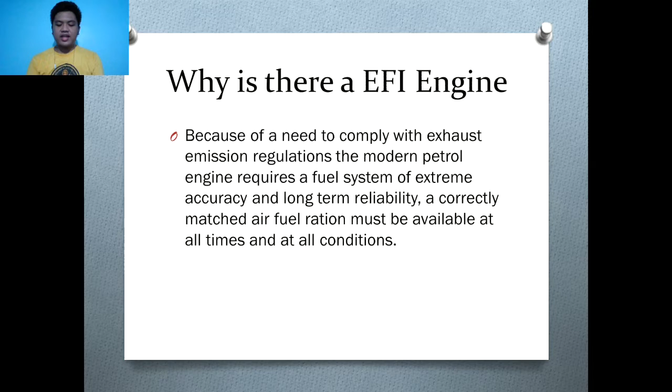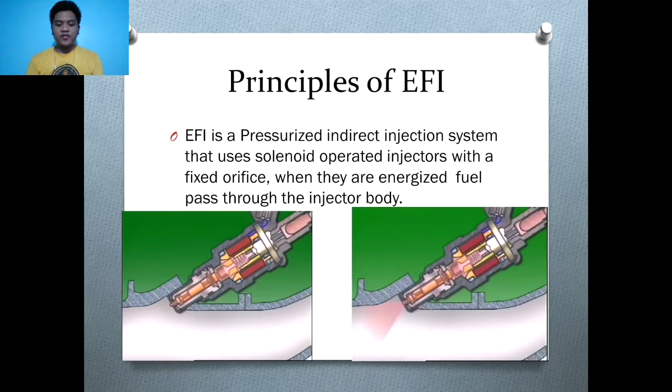Principles of EFI. EFI is a pressurized indirect injection system that uses solenoid-operated injectors with a fixed orifice. When they are energized, fuel passes through the injector body. So it has a similar approach to a fuel system of a diesel engine, but instead of an injector pump, the fuel injector is controlled by a solenoid to inject the fuel inside the manifold.

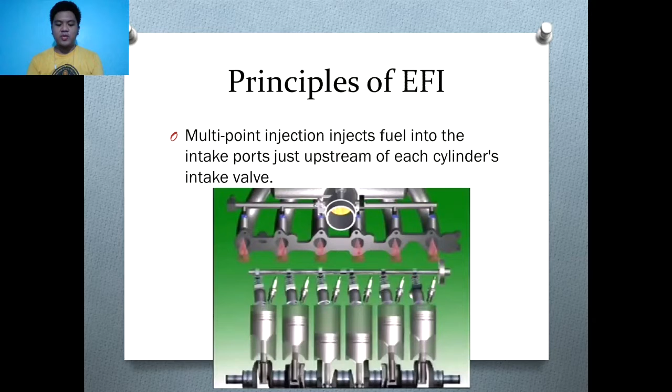Multi-point injection injects fuel into the intake ports just upstream of each cylinder's intake valve. This is one of many types of EFI layout for a petrol engine, but I believe this is the most common on sedan cars today. An electronic control unit, also known as ECU, opens the injector by pulsing their electrical current, then sprays fuel in each port directly in front of each intake valve.

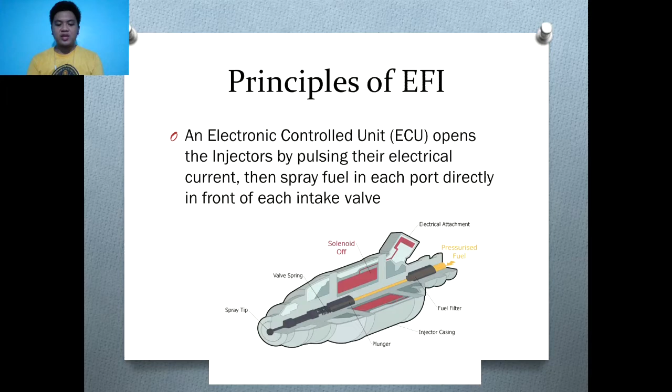Fuel leaving the nozzle is atomized and it mixes with the air also entering the system to form a combustible mixture. So unlike the carburetor, in which through the vacuum of the manifold, the fuel is sucked inside the intake manifold to mix with the air, for the mixture, EFI atomizes the fuel as it mixes with the air going inside the air intake valve.

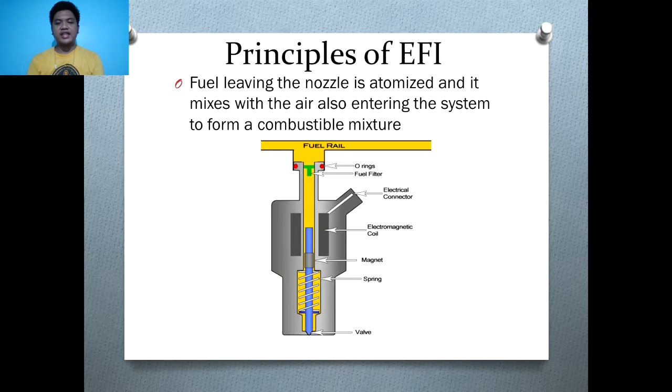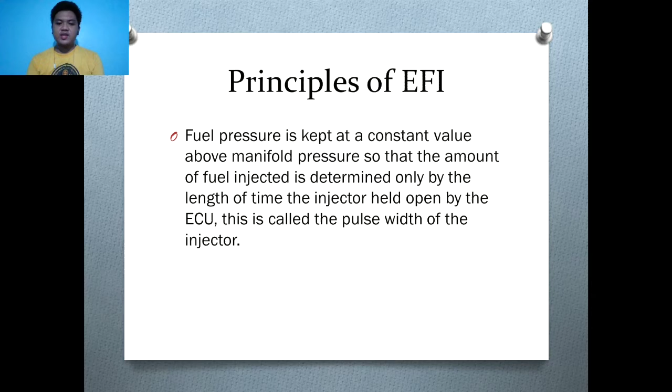Fuel pressure is kept at a constant value above manifold pressure, so that the amount of fuel injected is determined only by the length of time the injector is held open by the ECU. This is called the pulse width of the injector. Pulse width of the injector is a pretty complicated topic, but to simplify things, it is the duration of how long the fuel injector must be open.

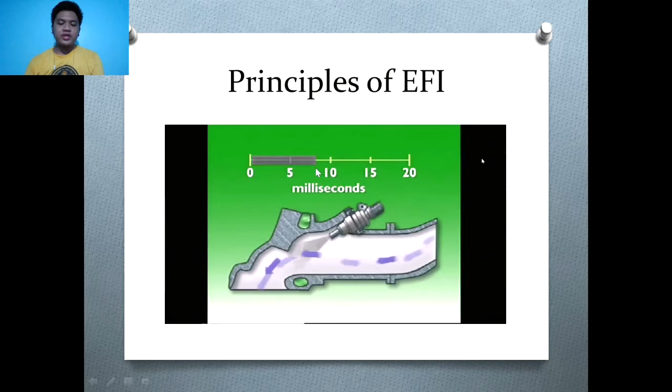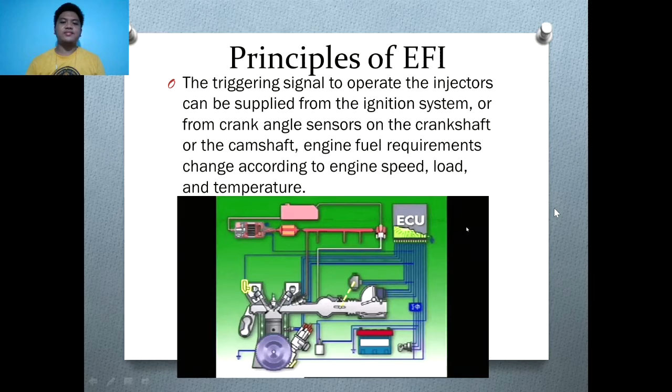The trigger signal to operate the injectors can be supplied from the ignition system or from crank angle sensors on the crankshaft or the camshaft. Engine fuel requirements change according to engine speed, load, and temperature. So you can see again in this GIF, this is the ignition system, crank angle, and the camshaft angle is right around here, and it all flows back to the ECU.

So the ECU needs information on these changes. Sensors measure this variable, then relay the information to the ECU in the form of electrical signals. The ECU then calculates the duration of pulses necessary to provide the fuel required.

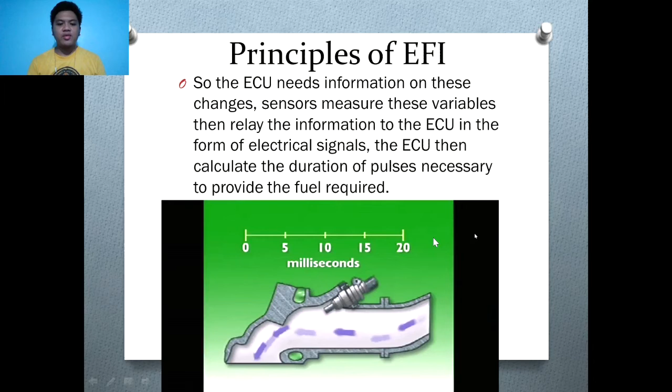Operation of an EFI engine. The gas pedal in your car is connected to the throttle valve. This is the valve that regulates how much air enters the engine. When you step on the gas pedal, the throttle valve opens up more, letting in more air. The ECU sees the throttle valve open and increases the fuel rate in anticipation of more air entering the engine.

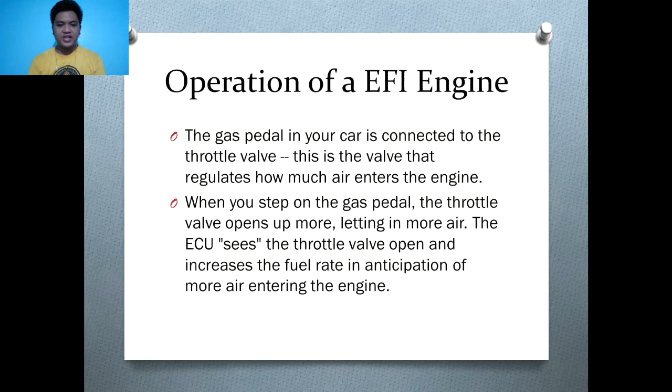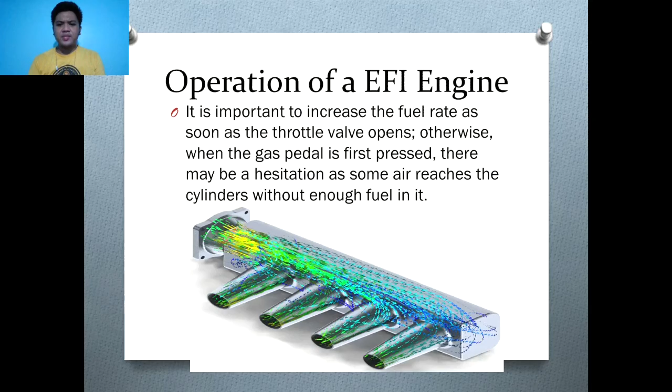So this is what the throttle body looks like, and it also looks like the throttle body plate of a carburetor. It is more important to increase the fuel rate as soon as the throttle valve opens, otherwise, when the gas pedal is first pressed, there may be a hesitation as some air reaches the cylinder without enough fuel in it. Sensors monitor the mass of air entering the engine as well as the amount of oxygen in the exhaust. The ECU uses this information to fine-tune the fuel delivery so that the air-to-fuel ratio is just right.

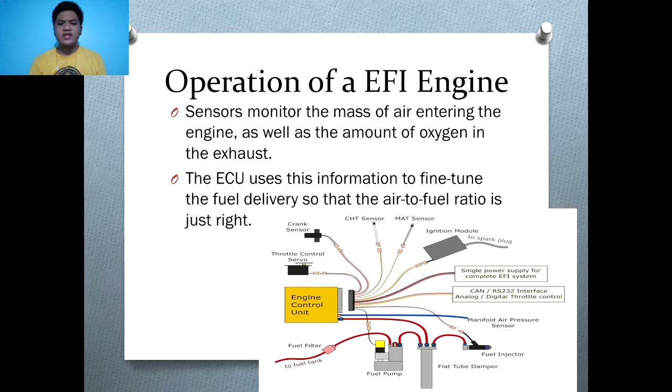ECU sensors: the mass airflow sensor tells the ECU the mass of air entering the engine. Oxygen sensors monitor the amount of oxygen in the exhaust so the ECU can determine how rich or lean the fuel mixture is and make adjustments accordingly.

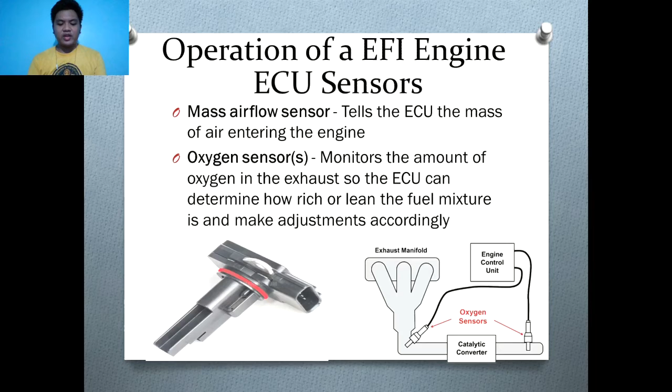The mass airflow sensor is responsible for telling the ECU how much air is flowing in the intake manifold, so the fuel injectors can compensate the fuel mixture. The oxygen sensors, usually in pairs, tell the ECU if the air-fuel mixture is too lean or too rich, unlike carburetors, which need to be tuned up for the engine to run efficiently.

The throttle position sensor monitors the throttle valve position, which determines how much air goes into the engine, so the ECU can respond quickly to changes, increasing or decreasing the fuel rate as necessary. The mass airflow sensor is usually beside or in front of the throttle position sensor. Both sensors tell the ECU how much air is entering and flowing inside the intake manifold to increase or decrease fuel rates.

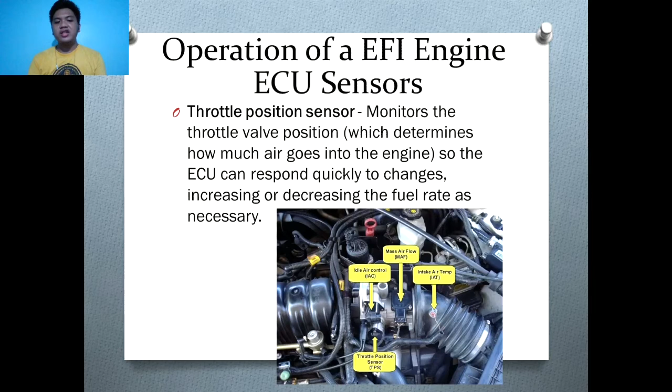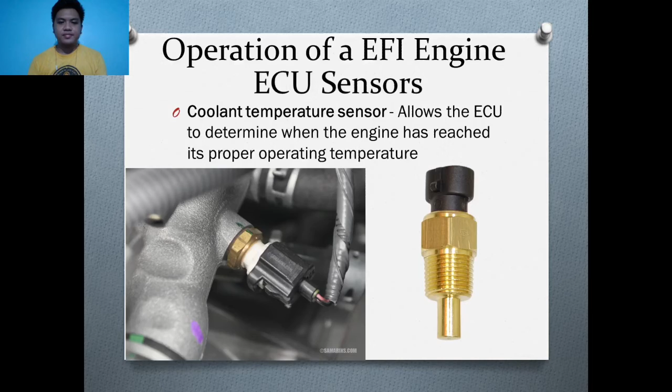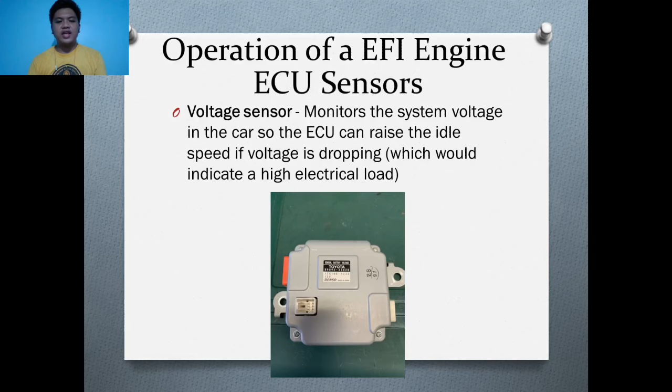Voltage sensors monitor the system voltage in the car so the ECU can raise the idle speed if voltage is dropping, which indicates a high electrical load.

The manifold absolute pressure sensor monitors the pressure of the air in the intake manifold. The amount of air being drawn into the engine is a good indication of how much power it is producing, and the more air that goes into the engine, the lower the manifold pressure. So the reading is used to gauge how much power is being produced. If you've heard the term MAP, this is what it means.

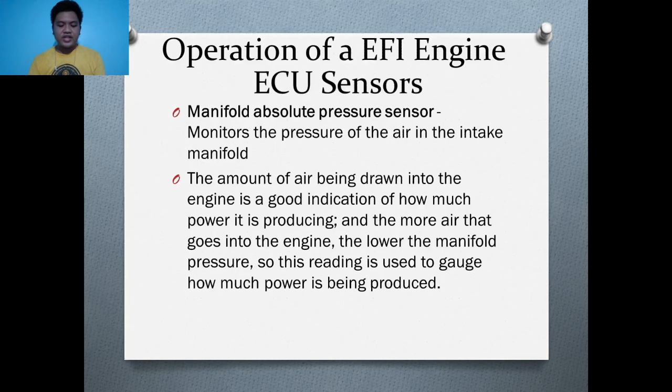The engine speed sensor monitors engine speed, which is one of the factors used to calculate the pulse width. The engine speed sensor is just like the tachometer in your gauge panel, but this sensor is different because it's connected to the ECU.

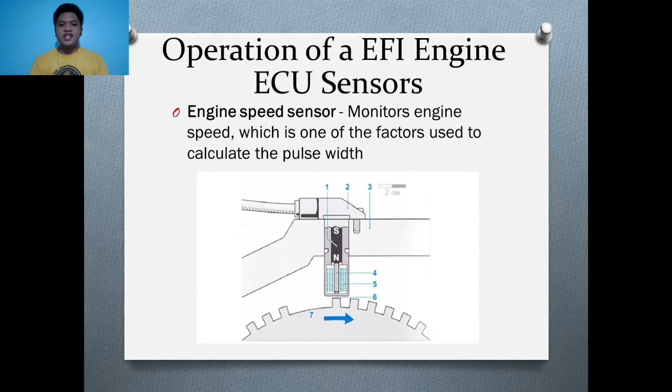Operation of an EFI engine fuel system. This is the part where we study the components that pressurize the fuel injectors.

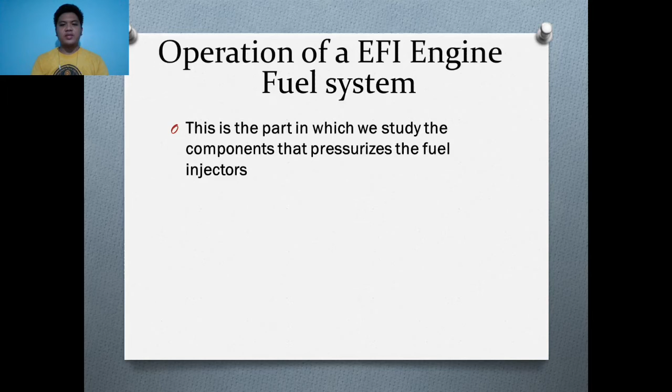The fuel tank stores the fuel, the fuel pump assembly, and fuel sensor. The fuel pump assembly usually holds the fuel pump, filter, and the fuel sensor.

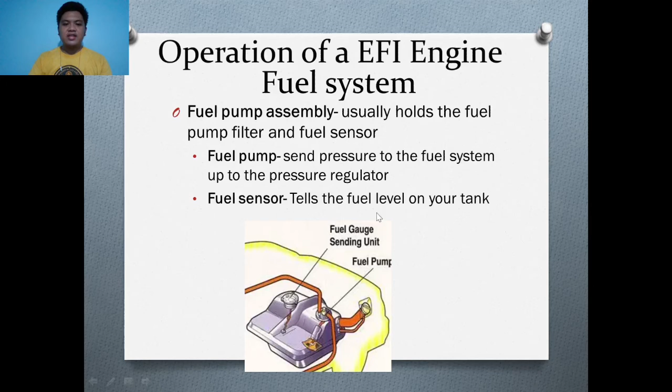The fuel pump sends pressure to the fuel system up to the pressure regulator. The fuel sensor tells the fuel level in your tank. The fuel sensor is pretty self-explanatory, and the fuel pump is the one that sends pressure to your fuel injectors. I said fuel pump assembly because in most modern cars today, the fuel gauge sending unit and the fuel pump are already integrated, that's why it's called an assembly. But in this picture they are separate, so I've separated their uses.

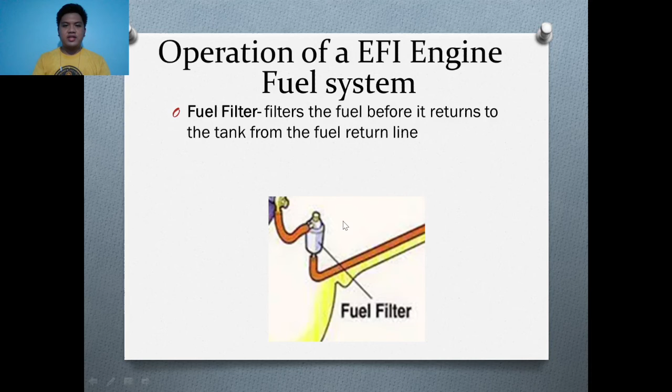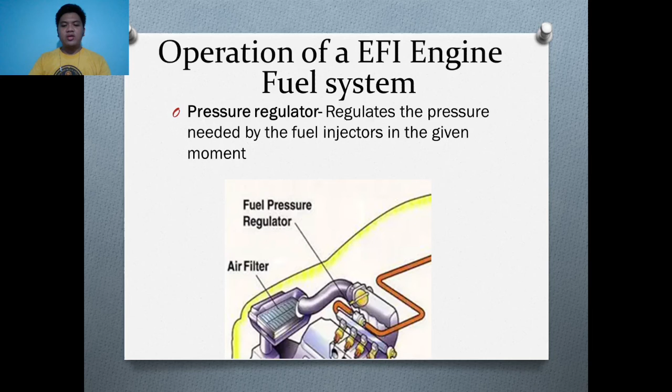The pressure regulator regulates the pressure needed by the fuel injectors at a given moment. The fuel pressure regulator makes sure the fuel rail is not overly pressurized, and relieves some of the pressure if needed, or increases the pressure if needed also.

The delivery pipe, consisting of a feed and return pipe, connects the fuel rail to the tank of a car.

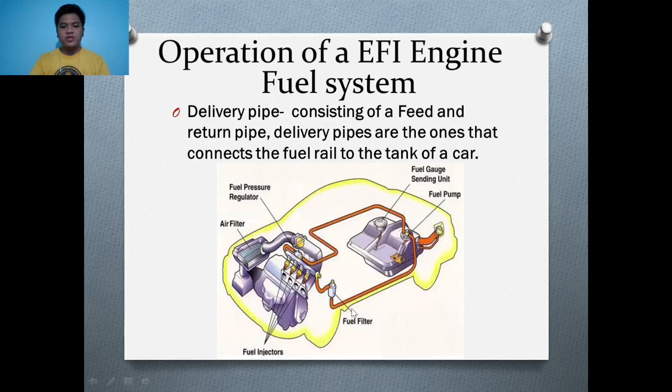As you can see in the diagram, this is the fuel pump, and this is the delivery pipe going into the fuel regulator. After passing through the fuel regulator, it goes to the fuel rail and then into the fuel injectors. The return line passes through the fuel filter and returns back to the tank, where it can be cycled again.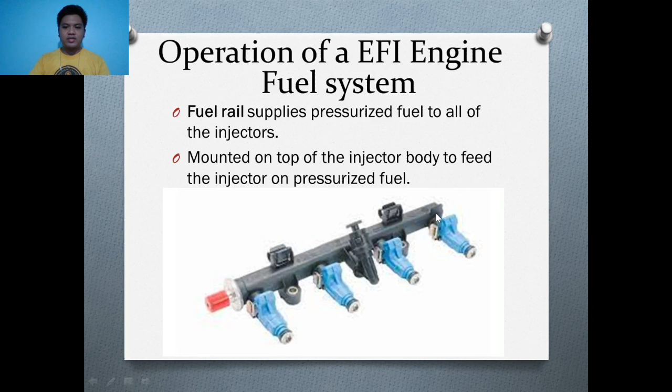The fuel rail supplies pressurized fuel to all of the injectors, mounted on top of the injector body to feed the injector with pressurized fuel. This is what a fuel rail looks like, just a straight rail, where the feed goes in and the return line goes out.

The fuel injector - by this point I think you know what fuel injectors do. They inject the fuel, that's what we've been talking about for the past twelve minutes. That is all.